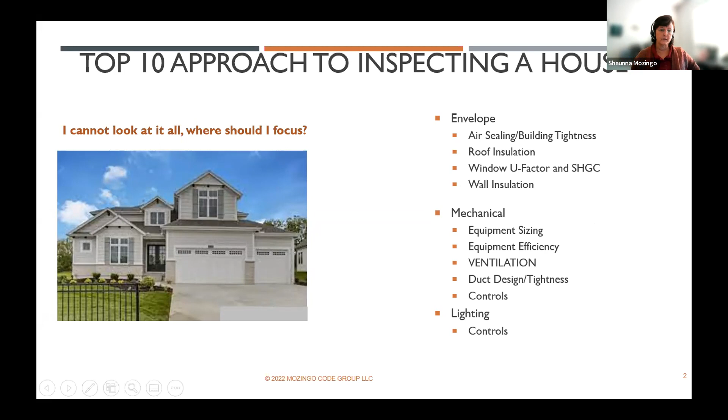Mechanical - the right size of equipment, the right efficiency of the equipment, ventilation, ventilation, ventilation. We're going to hit on that a lot today. Duct design, duct tightness - we'll talk about that. And controls, shutting things down when we don't need them. Same with lighting - the lighting efficiency of the light bulbs, they're pretty much there already. So it's really about shutting them off when we don't need them so that we're not running that electricity all the time.

One thing I've learned as an inspector is as I go through and I'm walking through a house, especially on a rough or a final - oh my gosh, there's so much to remember. So how do I get these things to stick into my head? What I've learned is if I understand how my building works, then I'm more apt to remember to look for certain things in the field. So I just have a couple slides here on air movement so that we can better understand why air tightness is such a huge deal in residential.

Wherever air can get into the building, so can moisture, pollutants, and other things. So we really want to keep this air leakage to a minimum for the building's durability, air quality, and health and safety. Also, if you have a lot of air leakage in and out of the building, your mechanical system has to work harder because, you know, maybe it's 20 degrees outside, and if that air is leaking in, the mechanical system has to reheat it. So we're trying to keep that mechanical system from not working as much - there has to be more efficient ways to deal with this. And we just want to gain some predictability on our interior environment.

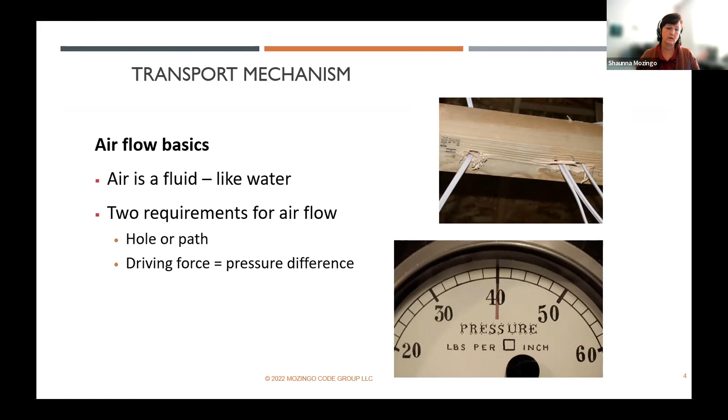So air moves just like water. It just needs a hole, and it needs the right pressure, the right temperature, the right relative humidity, and so air can move. And like I said, anywhere air can get in, so can moisture. So it's important to understand why we say seal all of these holes, or make sure that the air barrier is sealed everywhere. Air can move and bring with it a lot of different things.

The building works with stack effect. So you have colder air at the bottom. As it warms up, it rises, and it's trying to get out all of those holes everywhere in the building. That's why we're really strict about sealing up that attic access or getting tight around those can lights, because that air is trying to get out. And whenever air goes out, what goes out must come in - it's always trying to pressurize itself or keep a neutral pressure. So if air is leaking out somewhere, the house will draw air in somewhere else, and with it, it'll bring whatever it brings with it - moisture, pollutants, cold air that has to be reheated, hot air that needs to be cooled. So that's why we're trying to keep this - this is just the normal way that air moves.

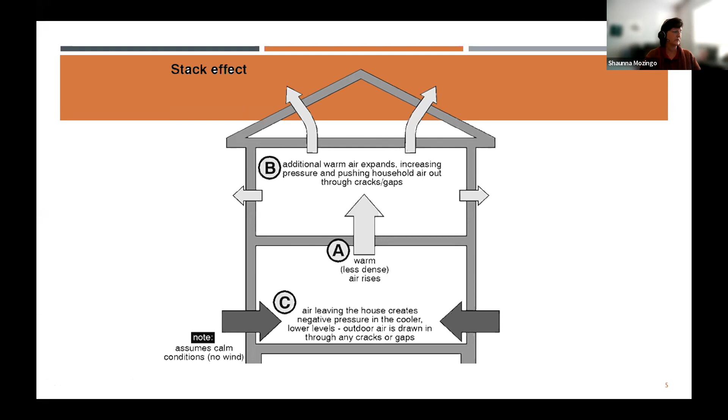So trying to make sure that thermal envelope is tight - that's why there are requirements for a tight envelope. Now new requirements say the plans have to show all the air sealing details on there, and hopefully you're inspecting from those plans to check those details that they've called out.

Something I want to point out here, and I know you've probably seen this a bunch, but this is one place that I find in residential we have a lot of problems - duct leakage and thermal envelope leakage. There are reasons why the mechanical code tells us to keep a tight duct system and to make sure we keep the envelope tight. A lot of times we think, oh, I need to keep tight ducts so the air doesn't leak out, so that if I need 200 CFM out of these supplies in order to keep this room 68 degrees, then I'm going to bring back 200 CFM.

I have to do supply equal return, right? So if I need 200 CFM, I don't want these ducts to leak so that I get the right amount of air there. Well, if the ducts leak, will I still get 200 CFM? Sure, I will, but the mechanical system has to work harder to get it there.

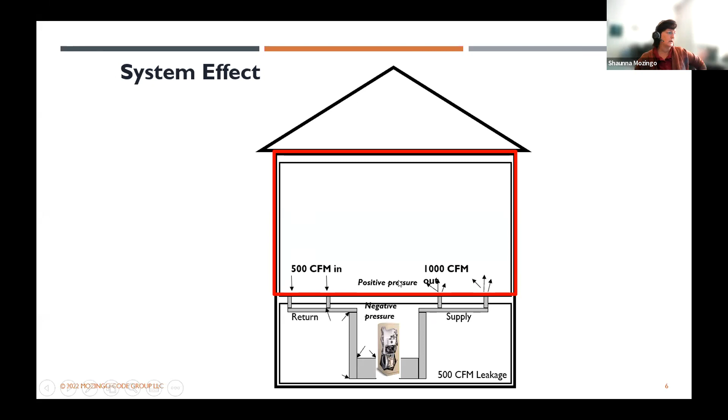So we often think about that when we're looking at duct systems and making sure they're tight and sealed. But something else to think about with a leaky duct: if you're trying to heat and cool this space and you're supplying maybe 1,000 CFM to heat that whole upstairs, but your returns leak and you're only bringing out 500 CFM, then you are overpressurizing the upstairs. You're blowing it up like a balloon. The house is always going to try to equalize its pressures within itself.

So it will force air to come in somewhere else, right? I'm forcing air out of this envelope through any hole that I have, and it will eventually make those holes bigger. And I'm sucking air in from outside, bringing with it any moisture or cold air, so now I have to work harder.

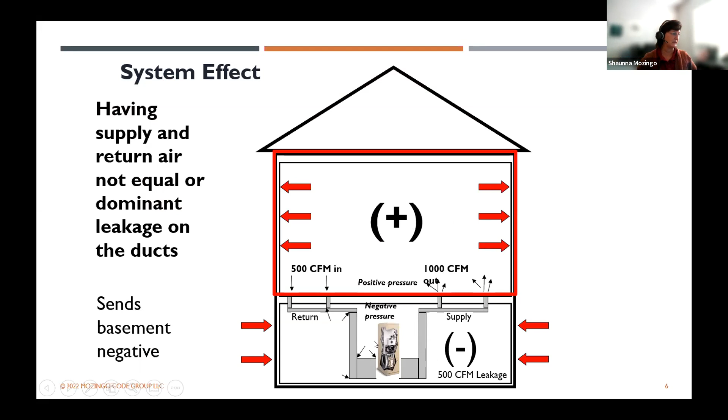So it's not just about getting the right amount of CFM to keep the room the right temperature. It's also about sealing those ducts so that I don't overpressurize or underpressurize any portion of the house, and make the building less energy efficient by bringing in colder air or wrecking my thermal envelope.

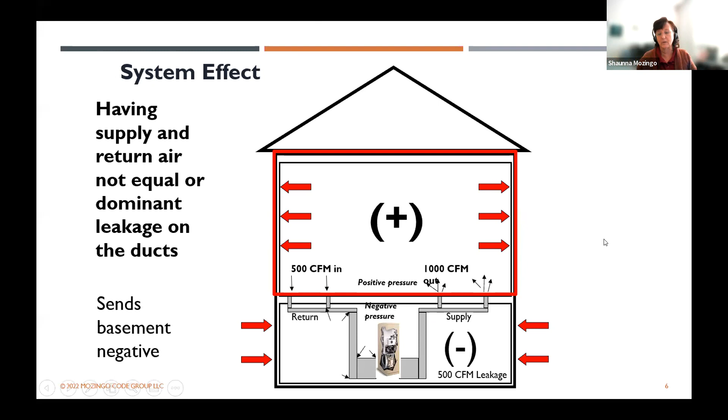So there are different reasons why we're always saying, make sure you seal those ducts. And sometimes just remembering that when I'm walking through on a rough inspection, a final inspection, or a mechanical inspection, and I'm looking at those ducts, knowing there's more than a few reasons why we need tight ducts helps me remember to look for that. Look for all of that pookie on there, right?

And we also want to make sure we're not bringing moisture into the house, because a lot of times we don't see that moisture till a long time after the building is up and operating, years afterwards, and people are sick and don't understand why, because inside their walls is moisture that got in. There's a lot of different ways it can get in there.

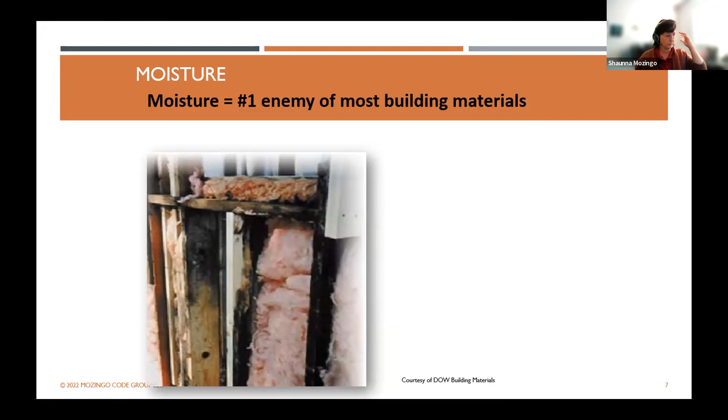So I'm just trying to point out why the code is so strict about building a tight house and getting that envelope right, making sure we don't have a lot of air moving through those walls. If air is moving through that wall, it's reducing the R value by going through the insulation. It's bringing with it any kind of moisture, cold air.

Cold air might be condensing on a warmer surface, or warm air might be condensing on a cold surface inside that wall, causing a lot of rot in there. There's all kinds of things that can be happening. So it's really important to be catching this at the inspection phase.

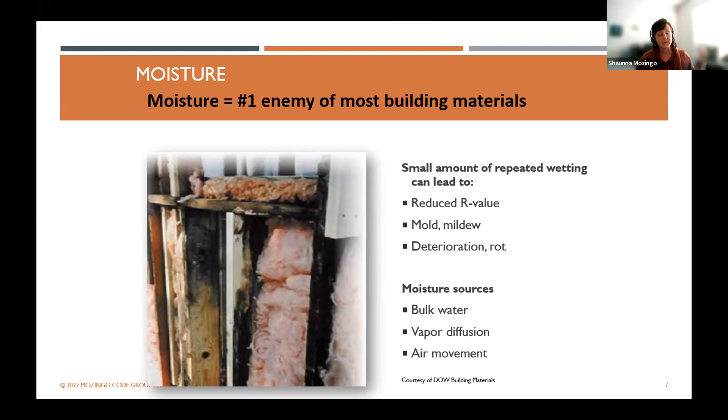There's a lot of moisture sources. Bulk water, I might have rain hitting a wall and it's getting through, or a sprinkler system that for some reason is hitting the wall all the time. There might be snow up against my house that's going to melt, and I have bulk moisture. I have diffusion, where with just the right temperature, air can move through building assemblies like drywall and other things, and I'm going to get that moisture in there just from air leakage, air movement. So lots of ways it gets in there.

Sometimes it's easy to see the moisture or the mold or the mildew on the surfaces. I have air leaking around a door, and it's cold air, and it's condensing on a warm surface here. So I'm going to get this mold. Somewhere in here, there is an air leakage problem, right?

Another thing with moisture is, the nice thing about air is it brings moisture. It can be, but air also dries moisture, right? So it's again about predictability. Where's the air coming from? I want ventilation.

If I had the proper amount of ventilation in this house, I wouldn't have this condensation. I need ventilation to keep that air dry and to keep these surfaces dry, but I need that air to come from a controlled source, not from the outside, that cold air hitting that warm surface or that warm air hitting that cold surface, right?

So that's what the code is talking about. And we're really going to hit hard on ventilation when it comes to inspections. It's definitely the top 10.

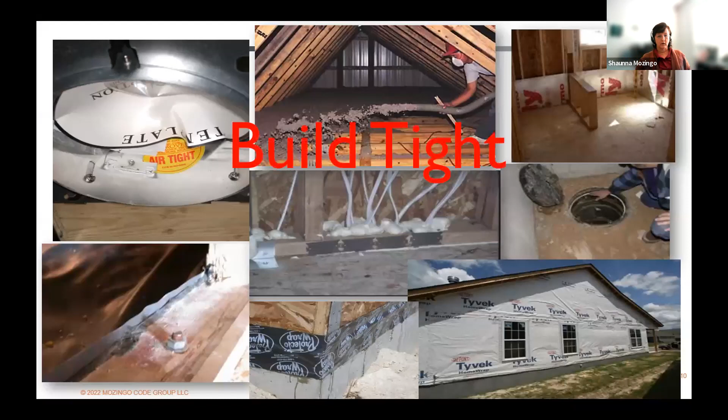You always hear it, but build tight and ventilate right. So a couple things that you should be aware of as an inspector for residential.

There is a new requirement in the 2021 that inspectors really have to look for the flow rates for ventilation. Maybe the IRC says, according to the size of this house, we need 75 CFM running continuously. Now there's a requirement that we actually prove that's what we're getting.

So there's a requirement for testing of the flow rates and a report that gets turned in. Most likely the building inspector or mechanical inspector is not out there testing those flow rates and carrying this equipment around. Most likely you will just be collecting a report from somebody that's doing it.

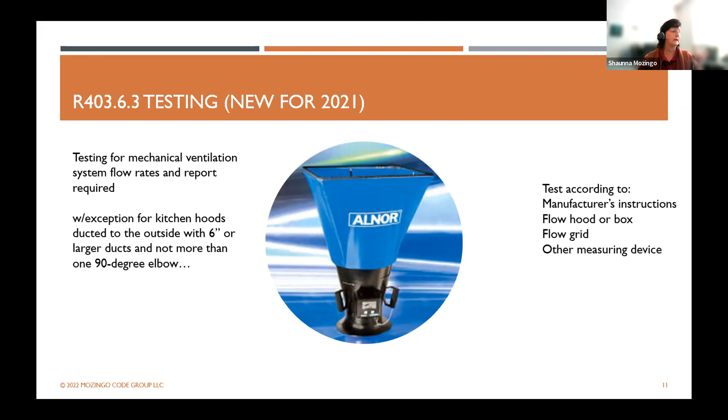We often require balancing on commercial, or some jurisdictions require balance reports on residential. We require duct testing and we get that report. We require blower door testing, we get that report. This is another report we're going to get that says, hey, this whole house was designed, and according to how it was designed, here's how much air needs to flow through there to keep it healthy, dry, safe. So we want to make sure we're getting that right amount of air.

IECC doesn't really call for ventilation, it says you have to have mechanical ventilation. We can't rely on outside air just opening a window. It has to be mechanically ventilated, and then it sends you to the IRC for how to do it.

So just a couple things as an inspector that are really important to note. It'll tell you that you can do a supply, exhaust, or combination system. So we'll look at each of those and what to look for.

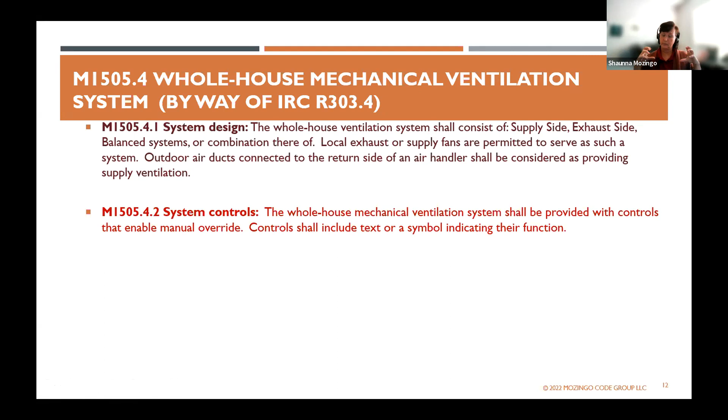It tells you that the system has to have controls, and it has to have an override control. So what it's telling us is, if you look at the table, which we'll look at in a second, it'll tell you how much air has to be brought in. And that table, or it gives you an option for a formula to calculate how much air has to be brought in.

That is at a fan running continuously, or a system running continuously 24 hours a day. They also have the option to not run continuously, to run only part of the time. So if that happens, there's going to need to be controls. A lot of times plan reviewers aren't catching this, and the inspector really needs to catch the fact that those controls are installed.

So if they say, oh, we're only going to run a quarter of the time, alright, where is that automatic control that will allow this system to only run 25% of the time? It better not be an on-off switch that the homeowner runs. We need that 25% of the time.

The code says if you run 25% of the time, you have to quadruple the amount of ventilation than if you were running continuously. So we just need to make sure as inspectors we're looking for those controls, and that there's also an override control.

So if there's a fire outside, or there's something going on, I have the ability to shut it off so I'm not sucking in all of that air with whatever system I'm using.

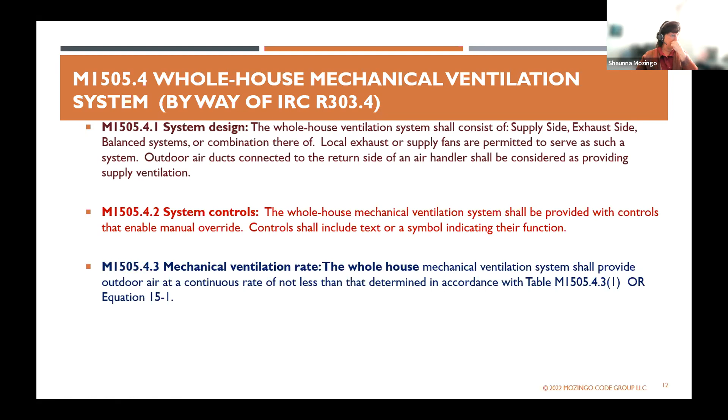The house, it gives you the option, like I said, for a ventilation rate that goes to the IRC mechanical section, and it tells you either do by the table or do by a calculation. It's based on how big the house is, how many people live in it, or at least how many bedrooms.

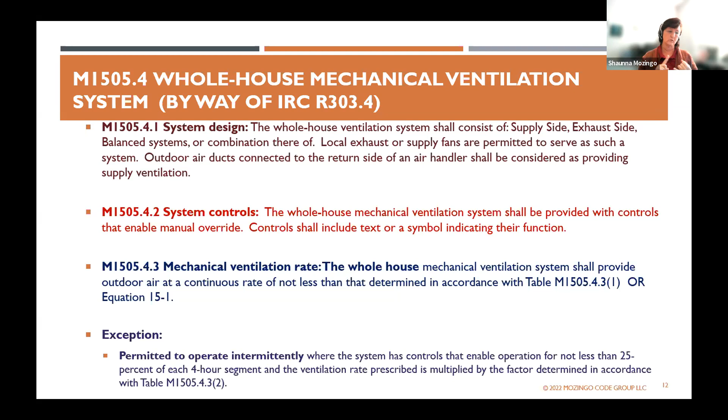And then again, an exception, you can run intermittently only part of the time as long as you have the right controls. That's where I see people putting in the right size exhaust fan or the right whatever system, but no controls to automatically make it run. So just be aware of that.

There's a bunch of different types of system. We can do an exhaust only system. What goes out must come in. So just keep in mind, this works fine for our climate. We have a drier climate in Colorado. And so it works.

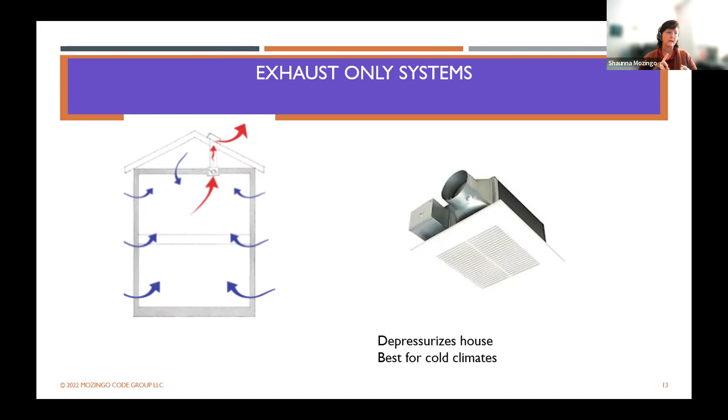It's not ideal for a tight house to just be exhausting all the time without offsetting it with some return or supply air, because you could start doing damage to the thermal envelope. But it works here. You could put an exhaust fan, usually in a bathroom, on a timer and have it going all the time - it'll exhaust air out and bring air in. So you want to make sure somewhere in the house they have 1 or 2 exhaust fans, based on how many CFM are required, with the right controls.

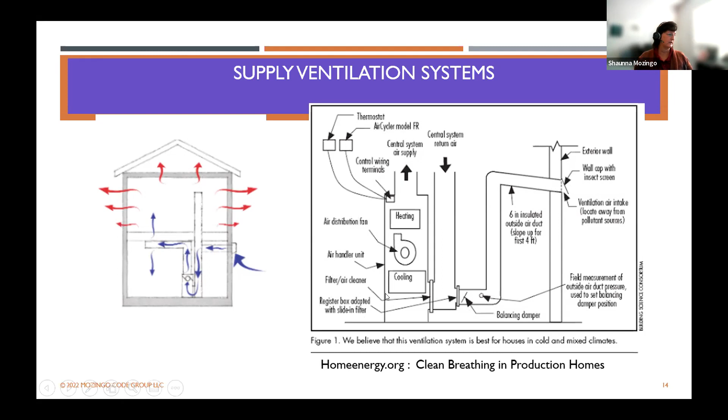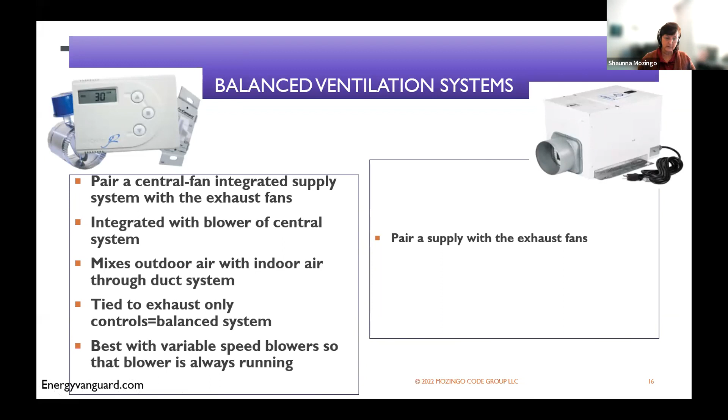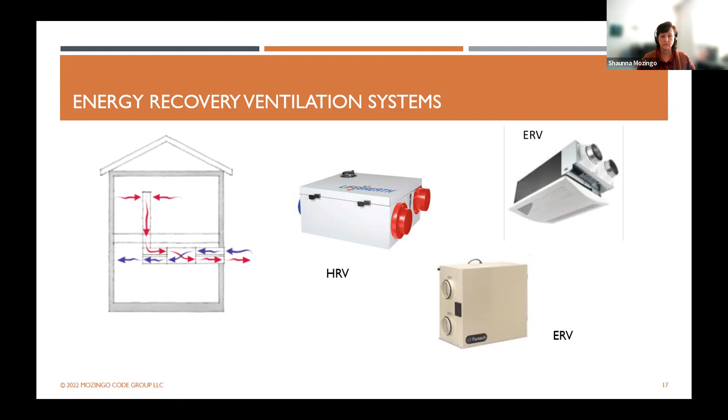Then there's ERVs - an ERV is an option. When people think 'I have to have balanced ventilation,' this is what they think, but it doesn't have to be this. It's more expensive upfront, but it also saves energy over time because it has a heat exchanger where the air from outside runs across it, tempering the air that gets brought in. An ERV, an energy recovery ventilator, will remove some moisture, where an HRV does not. An HRV, which is a little cheaper, is good in our climate because we have a pretty dry climate. So just make sure wherever the ductwork is installed, it's insulated, tight, installed to manufacturer's instructions, and has the right controls. It's so important that ventilation works correctly.

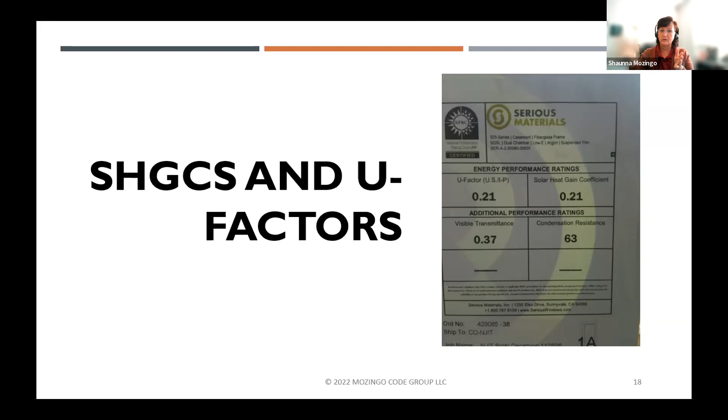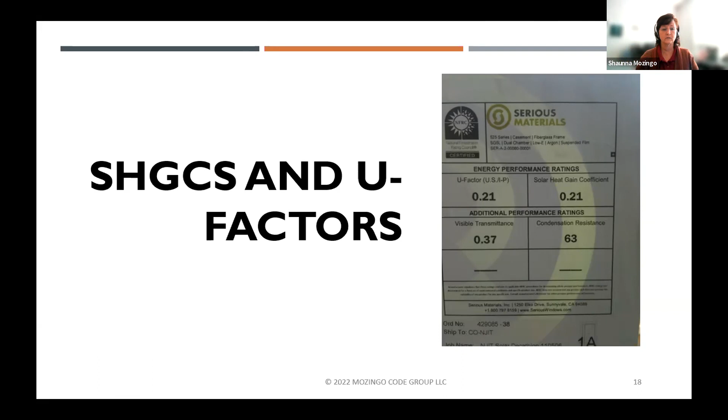U-factors - in residential, it isn't as big of a deal, I mean it is a big deal. The U-factor of a window is so important, because if you have a bad window, all that heat makes it in and the air conditioner has to work, or all that cold makes it through and the heater has to work. Wherever there's a window, there's no insulation, so making sure it's a good window would equal out to if there were insulation in the wall. There are stickers on the window for U-factor and solar heat gain. Pay attention - in Colorado, in some of these climate zones, U-factor or solar heat gain that was never a requirement before is now required in the 2021 code. So you're going to be looking at the U-factor plus the solar heat gain on those stickers - be sure you're looking for that. There are more requirements coming that will limit the amount of windows you can have on a residential building and lower those U-factors and solar heat gain coefficients. So it's good to learn about them right now - they make a huge difference.

So I just throw this up here as an inspector - it's good to know what paths are available to somebody in the code for residential. And the main reason I say that is because hopefully you're inspecting from the plans.

Say the plans say that they're going to put in a 0.32 window, and you get out in the field and they're not 0.32. Does that mean you fail them and make them put in the right windows?

If that was a prescriptive requirement, then instead of failing, they have the opportunity to go back and work through all of these code change paths of compliance. So if they start out prescriptive and they get to doing construction and it doesn't work, they have the opportunity to go change. Maybe they can run a REScheck that allows some trade-offs for the building thermal envelope, doing something above code here and below code there, but they equal out.

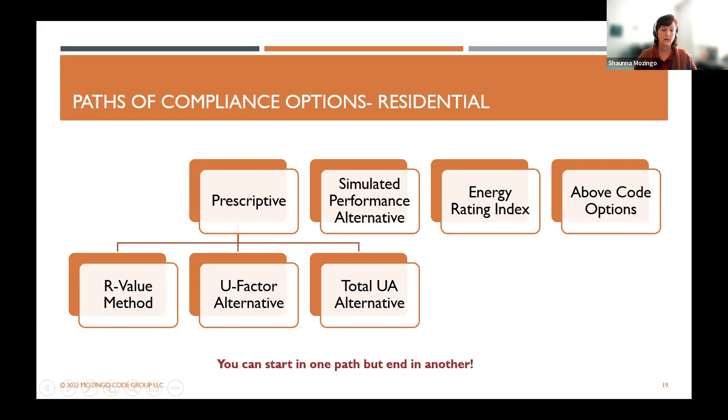So they have the opportunity to run a REScheck and see if they can still make it work. If they can't pass with a REScheck, they can get a rater involved and go performance, or they could go ERI for even more things to trade off. So it's not just one way. If they fail, it's not on you to tell them what to do, but there are other options they could pursue. They don't have to yank it out and put in something new unless they've gone through all those paths and still can't make it work.

Hopefully a lot of you are familiar with REScheck. One thing I've noticed in a lot of residential studies I do is that the REScheck is not making it into the field with the approved set of plans. This REScheck is letting us know if they're passing using this total UA trade-off.

It's a path they're allowed to use. And if so, it means they've gone through here and made some trades—maybe better insulation to put in a worse window, or a better window to put in worse insulation, or better insulation in the ceiling to put less insulation in the wall. There's all kinds of ways to trade, but it only applies to the envelope.

So it's important to know that a lot of times U-factor is not something you find on the plan, or R-value isn't something you find on the actual construction documents. A lot of times it's found in this report. This report is what you inspect off of for energy.

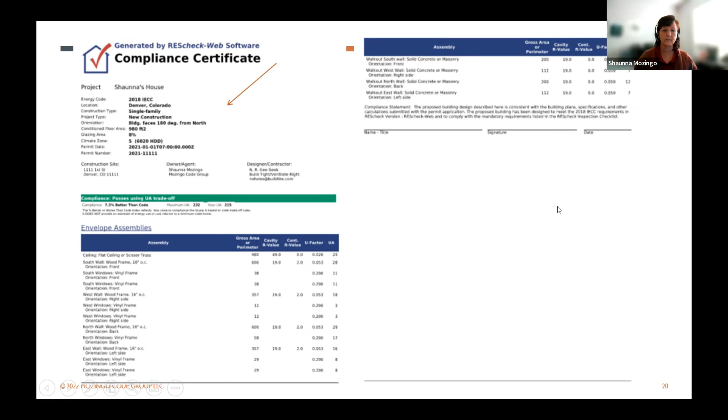So if I'm going through, hopefully I open the set of plans, and somewhere in there is this REScheck, and I open it up and see—oops, going the wrong way. It tells me I have a flat scissor truss with R49 insulation. That's what I'm going to look for, because they got it to pass using these values. Any other value, they either need to redo their REScheck to make sure it still passes, or they need to go a different path.

This tells me I have a wood frame wall at 16 inches on center with R19 in it and R2 continuous. Is that what I'm seeing in the field? Do I see the R19 in the cavity—probably a batt? But it also says I have an R2. What's that R2 about? Do I have insulated siding? Do I have a rigid foam board? What do I have on the outside of that building that's getting me an R2?

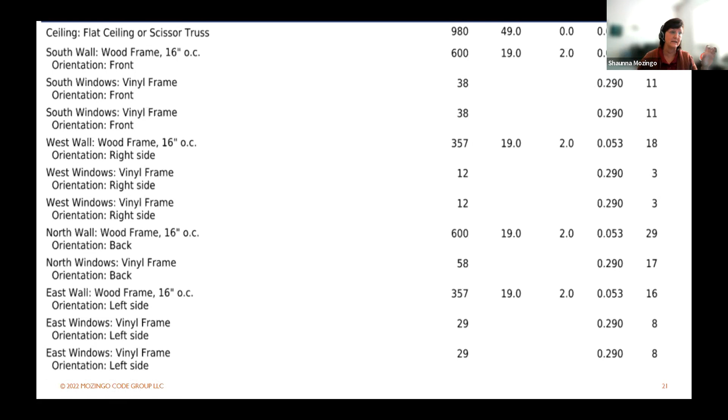If you're not seeing it, then they need to go back and redo the REScheck with what they really did, to make sure they still passed, because they only passed by putting that R2 on the outside. So just going through here—did you see 0.29 windows on a vinyl frame? This is what they said they were going to do, and this is how they got to pass energy compliance. This is what you should be inspecting off of.

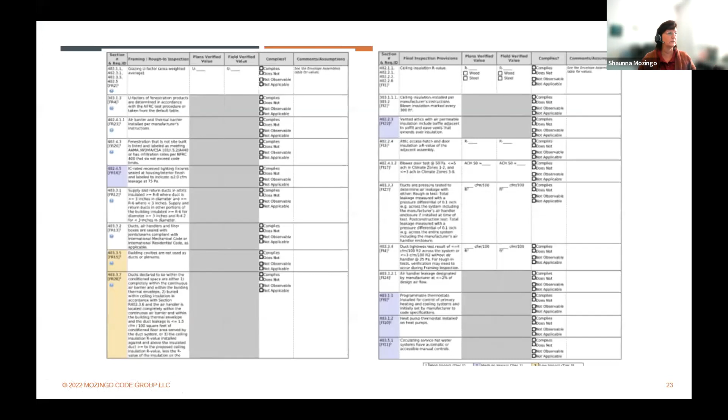There's an inspection checklist that REScheck prints out that is kind of handy, because it's specific to each house based on what you chose through there. It'll tell you what to look for and all of the mandatory requirements in the code, and it's laid out in the order of construction, from framing and rough-in inspection all the way to final inspection. Not that you have to use it, but some people like checklists.

If they went performance, it's almost the same thing. There's software out there that goes through and tells you, okay, how much did it cost to build this house? If I modeled it, how much will it cost in energy? And as long as it costs less than or equal to if you built it prescriptively, you're fine. The report is several pages, but it's just like a REScheck. It gives you what they said they were going to do - this U factor, this R value in the ceiling, this R value in the basement - and you need to make sure that's what you're inspecting off of, because that's where they made their trades.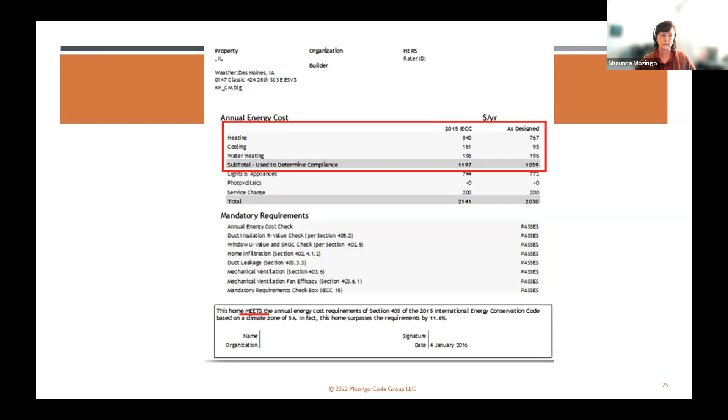So just being on the lookout. Then there's the ERI path - exact same software as that performance path, it just uses an ERI score. So you're making sure that if they said they were going to get a score of 45, they got a score of 45. It doesn't necessarily matter - what you really need to make sure is that for your climate zone, say you're in climate zone 5, if the max score you can get is 61, that they stay under 61. So they may have said they were going to get a score of 45 when they turned in the plan, but they might end up with a score of 60. They still pass, right? So that's okay, unless you have some amendments locally on a specific ERI score. That's kind of how you read those reports. Each report tells you what they said they were going to do in that house as far as R value.

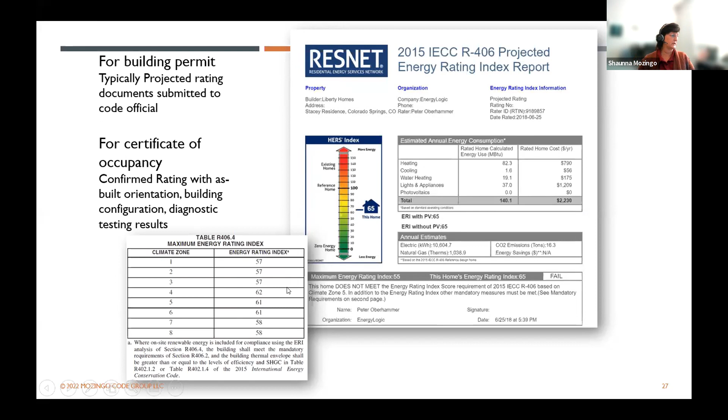So be inspecting from those documents.

And then there's the 2021 residential code, which brought in additional efficiency package options. So if I went with prescriptive or REScheck, I have to choose one of these options to do on top of everything else the code required. Somewhere on the plans it has to say what they chose, and that's what you need to be inspecting for, because this is what's getting them all the way to energy compliance. Without this, they're not all the way there. This is not something additional - this is to get you to full compliance.

So if DOE said that the 2021 energy code was 9% better than the 2018, it's only 9% better if they do everything that they're supposed to do. Instead of cranking the code down by 9%, they cranked it down by 4 or 5%, and then gave you options for how to get the other 5%. So you can see they have to choose one of the options in there: 5% better UA like a better REScheck score, or 5% better heating or cooling with more efficient equipment, better water heating equipment, a ductless thermal distribution or better duct system along with a better thermal envelope, or a better blower door score and an ERV or HRV. They have to choose one of those options to get into full compliance.

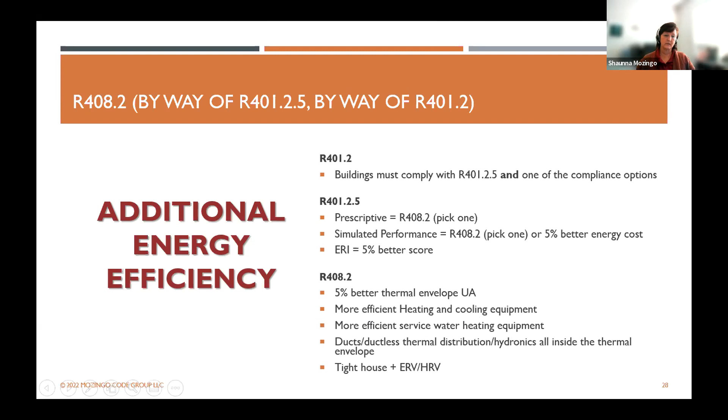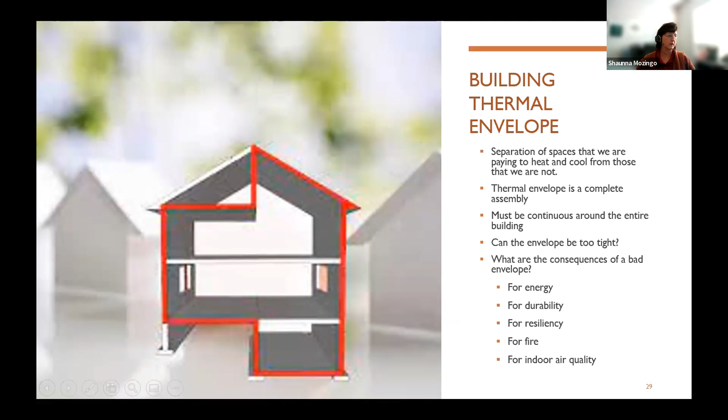So you just need to make sure that if they said we're going to put in a 5% better furnace, that they're not getting in there with an 80% furnace, right? Because they said they were going to choose high efficiency. So just something to pay attention to on the plans to make sure they're getting all the way there. Make sure the thermal envelope is fully sealed - the air barrier must be continuous all the way around, so every joint, seam, and penetration has to be sealed. That's something we really have to be looking for on these plans. That's why the code calls for a blower door test. Most of the time as an inspector you're not doing the blower door test yourself - you're looking for that report that says in your climate zone they got to 3 air changes per hour or less.

For those of you that are freaked out about it, I can tell you, I just looked at a study I did last year for NASEO, where we looked at 126 houses, and out of those we did 64 blower doors across the entire state, on people that were on anything from the 2009 code to the 2018. Out of 64 houses, only 8 did not pass. It's not that hard if you get the air sealing details correct. So that's important for inspectors to realize, we don't want to get to the end and fail a blower door. We really need to keep up with that envelope as we go.

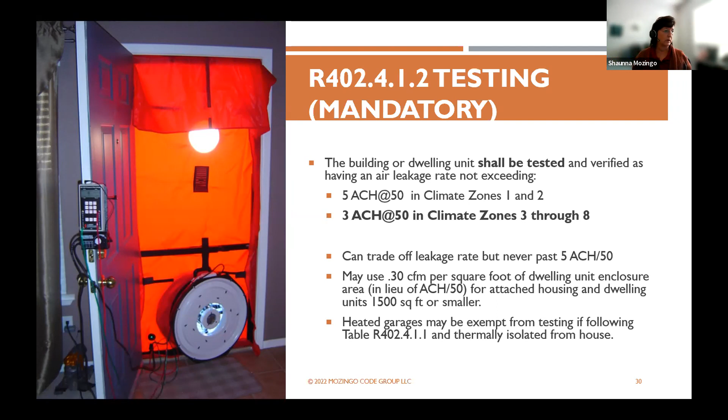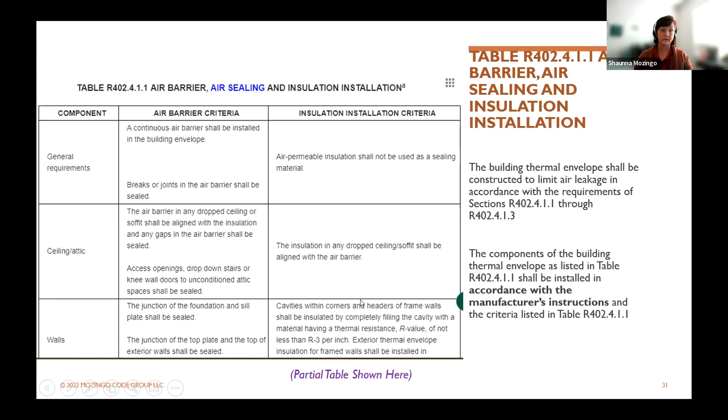Make sure that air barrier is continuous all the way around so that we don't get to the end and fail. There's an air sealing table in the code that they have to follow, and these details are all supposed to be on the plans of where to seal. If they do all of this, they're going to pass that blower door test, and all you're going to get is that report at final saying, yep, passed the blower door test.

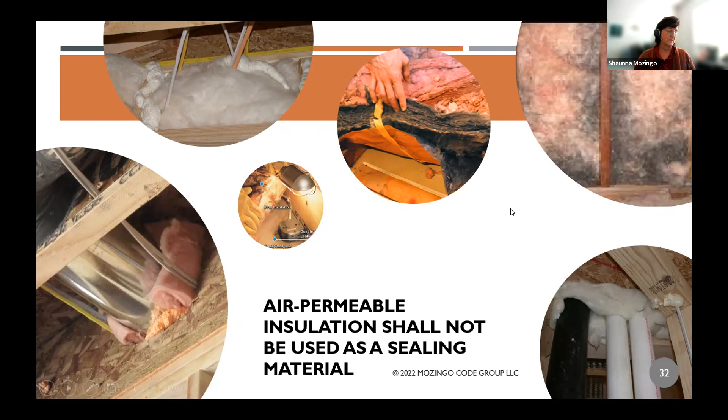So a couple places that I want to talk about where I see people messing up their thermal envelope. One is allowing air permeable insulation as a sealant. Around doors and windows, I see batt insulation used a lot. That works as a great filter, but it doesn't seal air. So be sure that, if it's part of the thermal envelope, we're not allowing batt insulation as that air sealant. We're making sure it's something like backer rod or foam or some other thing that allows air sealing and not just air filtering.

I also notice on attic knee walls that they're not getting their air barrier. An attic knee wall is actually an exterior wall - one side is unconditioned space and the other side is conditioned space. You need to have an air barrier up there. Maybe it would also hold the insulation where it's supposed to be. But I do notice a lot of attic knee walls not getting an air barrier on them.

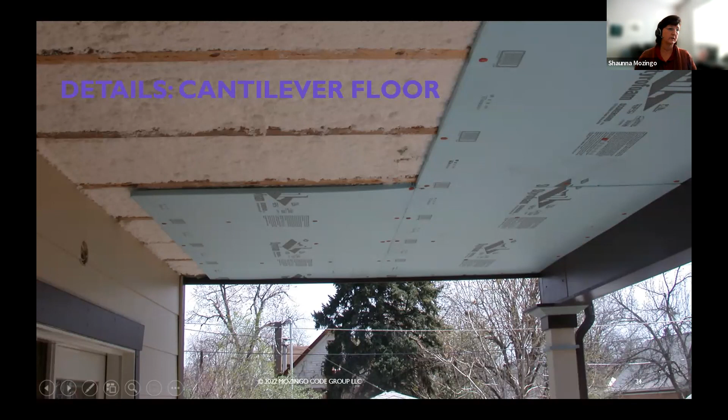And then I also see cantilevered floors getting missed, because there's not a lot of floors that have to meet code residentially, but we just need to make sure that anything over outside air or anything over unconditioned space gets its air barrier and air sealing. Making sure all of these places are covered - that's somewhere I see get missed a lot.

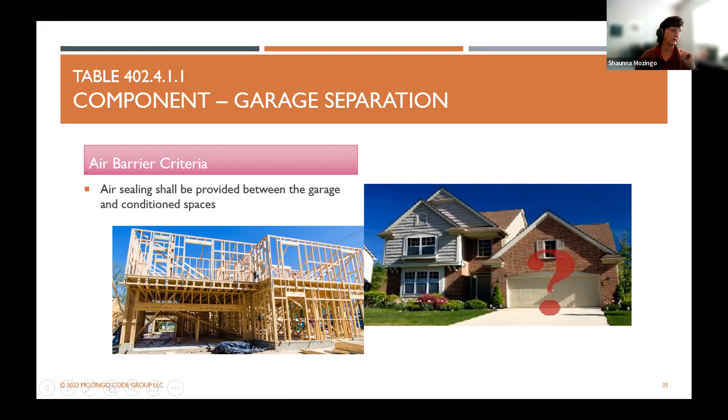And sealing between the house and the garage. Even if you're conditioning the garage, the code requires a thermal isolation between the two so that we're not sucking garage air into the house. Plus that garage door is pretty leaky. So if I'm trying to do a blower door and pass it and I don't have a good sealant between the two, it's going to be harder to pass that blower door test for the house.

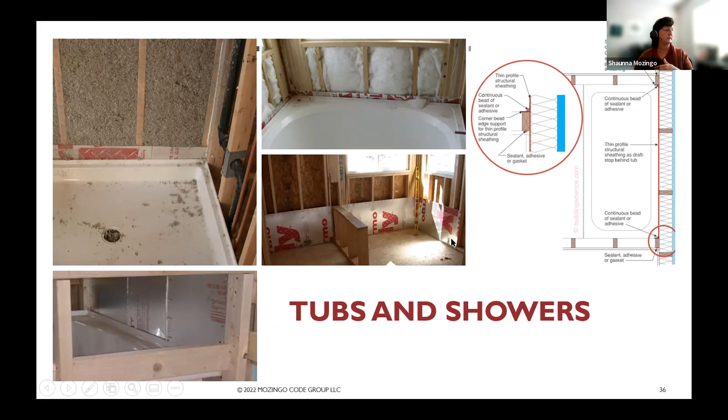And then I also noticed that a lot of people, when you have a tub or shower on an exterior wall, aren't getting your air barrier on there. So the tub gets set and no air barrier gets back there. Somebody might put insulation, but they're not getting an air barrier, so it's getting a lot of leakage in there. You're going to get moisture, condensation, and the insulation not working well. So making sure wherever you have a tub or shower - I always walk through on a rough inspection where I see a tub, and this is the common thing that I'm seeing, thermoply slapped in place. Then they can come set their tub and still insulate behind it later, but get that air barrier and air sealing before the tub makes it in - then it's much easier to do.

And electric boxes - it's amazing how much air, when you turn a blower door on and it's sucking all the air out of the house, air is being forced in somewhere else. How much of that air is coming from the attic, down the wall, and through that electric box. So making sure that electric box is getting sealed, because when a blower door isn't running, the air is moving the other direction. Any air or moisture I have in the house is getting into my walls through the electric boxes the other way. So we just really want to make sure those are getting sealed.

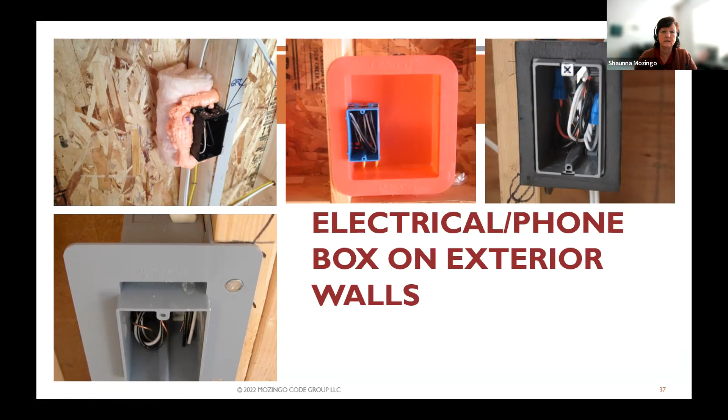Those are a lot of the places that I find problems with. I want to bring your attention to the 2021 Duct Requirements, where it was revised.

The basic intent here is if I have a duct in my exterior wall or in a floor over unconditioned space, I need to make sure I'm separating that duct from the unconditioned space. A lot of paths, like a performance path or an ERI path, give you a better trade if I say all my ducts are in conditioned space. The only way to do that is to make sure there's insulation and an air barrier between the duct and the conditioned or unconditioned space. Otherwise my ducts are considered to be in the unconditioned space. So there's a new section in the code that specifies whether it's in a wall, a floor, underground, in the concrete, under a slab, whatever, how to call it conditioned space and how to insulate it. Some new requirements there.

Really look at the plans, because if they're getting a credit for ducts in conditioned space when going performance, that's probably one of the biggest credits you can get. So there's a big credit for that. Make sure you're really looking for that, because you want to make sure they have an air barrier and insulation under it.

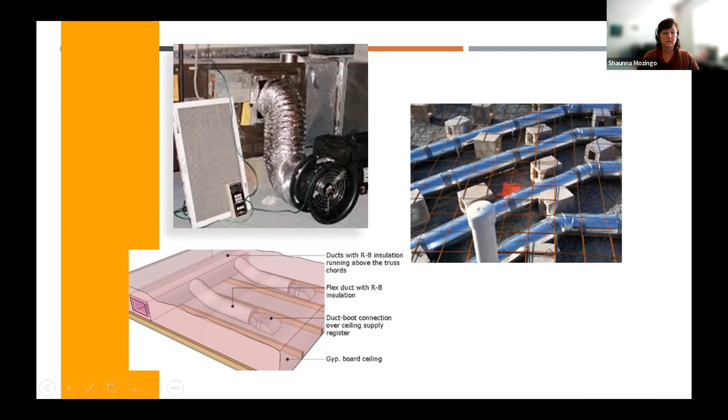I want to bring your attention to the fact that all ducts have to be tested now. It used to be only the ones in unconditioned space, but in 2021 you have to test all ducts. They don't want ducts leaking even from conditioned to conditioned space, because you're just moving air where it doesn't need to go if the ducts are leaking. Ducts within the thermal envelope can leak a little bit more, up to 8 CFM, and outside the envelope, 8 CFM inside, 4 CFM outside. So they can leak a little bit more, but they still have to be tested. That's new for 2021. Look for that duct test report for all ducts.

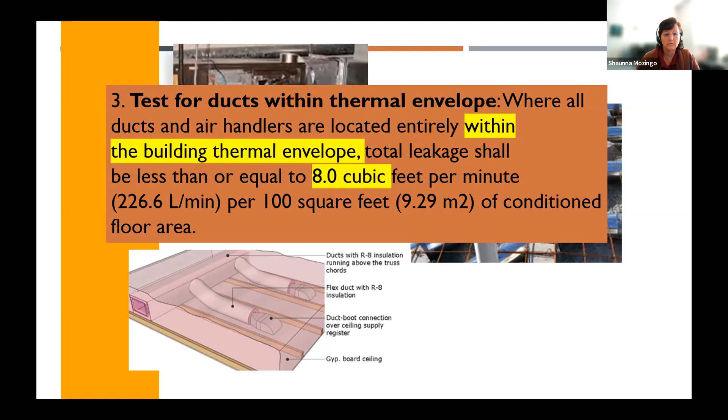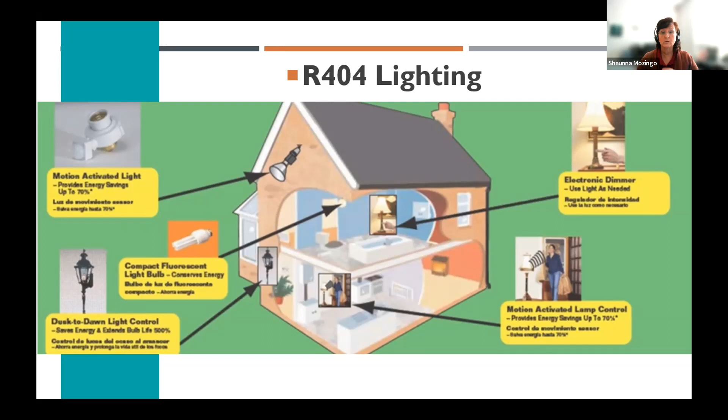Lighting - this is new for 2021. 100% of the lights have to be high efficacy, so you're looking for 100% of those light bulbs to be highly efficient. Then you're looking for controls. There's a new section requiring either a dimmer, an occupancy sensor, or some other control built into the fixture to be installed for the lighting. There are exceptions for bathrooms, hallways, and exterior lights, but exterior lights also have a new section in the residential code that says if you use more than 30 watts outside, you also have to have those on a control. So some new requirements for lighting to make sure you're inspecting for that.

Whew, that was residential, it takes most of the time. Commercial is really about internal loads. It never had a big focus on the commercial envelope until 2021, and now it does. So it's really about controlling things and shutting them down when not needed, and keeping the mindset that whatever happens with mechanical is affected by the envelope, which is affected by the lighting. All of them work together.

There's a limit to how many windows I can put in before I have to put in a certain amount of lighting controls. I can only have a certain amount of windows before it affects my mechanical equipment. So there's all kinds of interactions, you just have to keep that mindset.

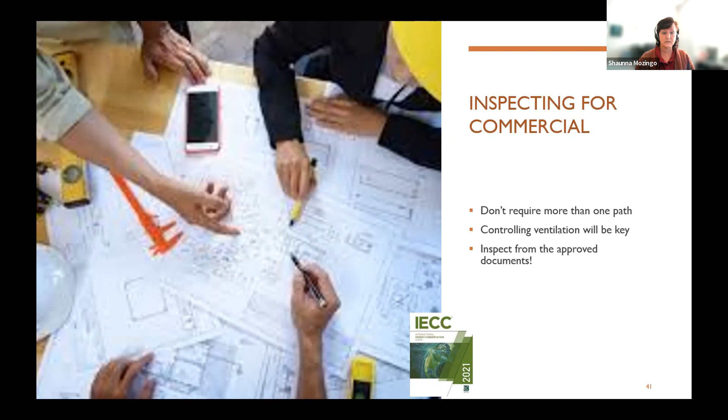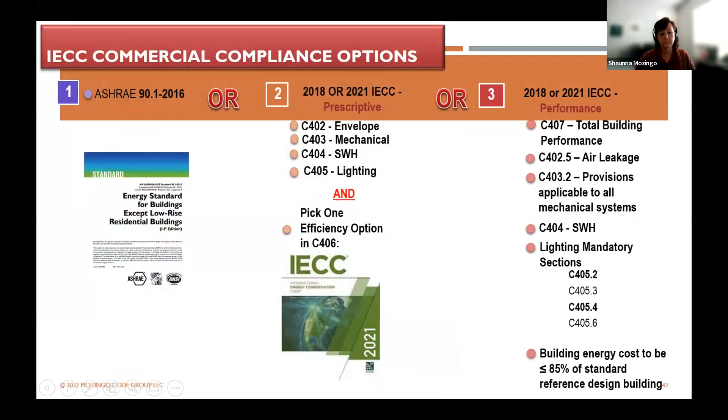Same as residential, stick to a path. If they don't pass it, there's another path they can choose, but don't make them go through more than needed. I often see on commercial where a jurisdiction requires a Comcheck no matter what, but Comcheck is for one path of compliance. If they go that path, yes, they need to turn in a Comcheck or something similar. But if they go prescriptive, they don't need a Comcheck. If they go performance, they don't need a Comcheck. So make sure they're only going by one path, and make sure you're inspecting from those documents based on the path they chose. There are 3 different paths - they can go with ASHRAE 90.1, the IECC prescriptive, or performance. So make sure you know what they chose so you're inspecting from the right documents. What about Comcheck?

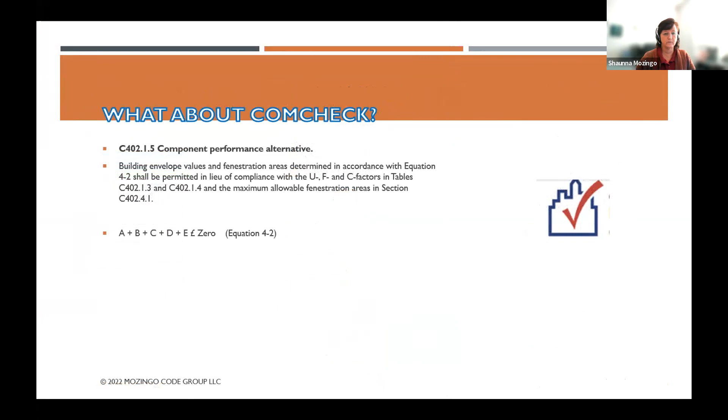Comcheck fits in here in this prescriptive path, but it's an alternative to prescriptive. Comcheck is great, you can review from Comcheck. They're allowed to trade off in Comcheck, but only in the envelope.

There is a mechanical and lighting report that shows up in Comcheck, which is just a mirror image of the plans. So if the Comcheck says there's 3 water heaters and 4 mechanical units, that better be what the plans show, because they're supposed to be exactly the same.

So you can inspect from the Comcheck. It has inspection checklists, those are great too. But on the envelope part is where they're allowed to trade things off, so just make sure that you're really looking for whatever that says.

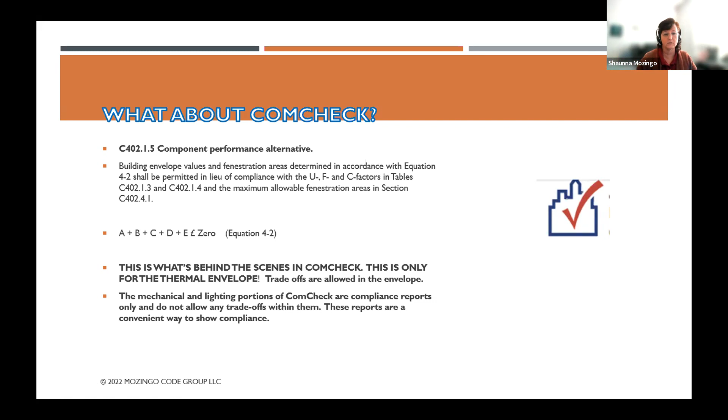They're going through their building this Comcheck based on what they're going to put in the house or put into the building. So what kind of roof? Is it insulation above deck? Is it an attic? They're building all this inside Comcheck and telling it what height of insulation and everything. So then Comcheck is forming that report that you inspect on based on what they said, and it should mirror the plans.

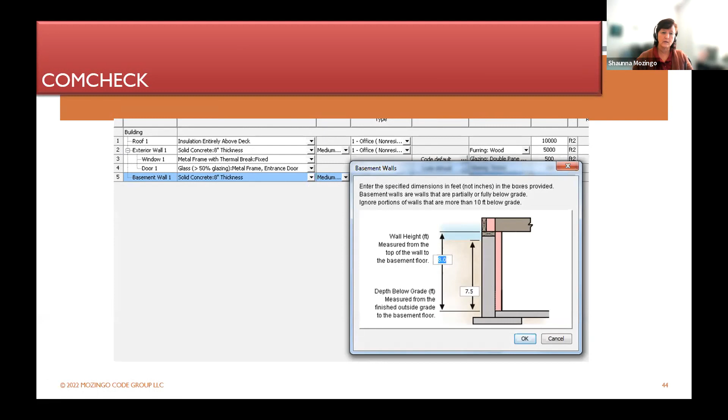Some things about windows have changed a little bit. It used to be that if it was a metal frame window, it could have a worse U factor, vinyl had better. Now it's about, is it a fixed window? Is it an operable window? What kind of window do we have? And so that's new.

For the 18 and the 2021, solar heat gain used to require a worse window on the north than you could have on the southeast and west, and now it's the same.

Is it fixed or operable? Fixed windows have a lower number than operable. Operable has moving parts. And then there's the projection factor.

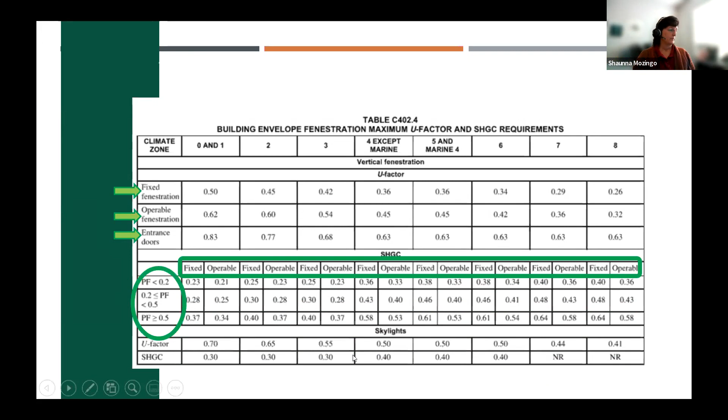This is something that inspectors need to pay attention to. People can get a break on their U factor, but they can only put in so much windows. They're only allowed 30% of their building to be windows. So if you see a building with this much windows, you can bet they're supposed to go performance, and you should be looking for a performance report that tells you what they're doing.

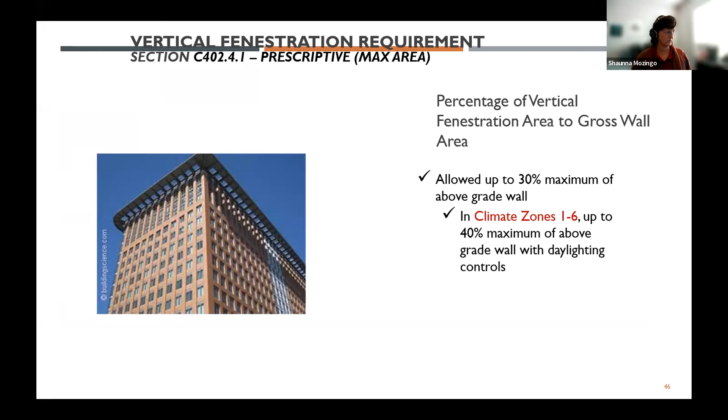They can go up to 40% as long as they put in some proper lighting controls. So if they have 40%, then you're looking for the right lighting controls. And so that's just the same thing.

What I want to point out to you is to be looking for those projections, because a lot of times they'll give themselves credit for a projection. If they put a projection over the window, they can have a worse window because they're blocking some of that solar heat. So they might tell you they're putting in a projection, and then you get out there and they don't put in one at all. We need to know that.

Because then they need to put in a better window. So that's just something you can usually see on a Comcheck. It'll tell you under their window description that there's a PF, and it'll tell you how big that PF is. The bigger the projection over the sill height, the bigger the PF, projection factor. So just really want to pay attention to that and let the plan reviewers know if they aren't putting in the projections like they said they were going to.

Air barriers have always been something required in the code, but just not really specific. Each cycle it gets a little bit more specific on what you can do, on what counts as an air barrier, as long as all the joints and seams are sealed. It's walked you through different materials that can be considered air barriers as long as you seal all the joints and seams. So that's what you're looking for.

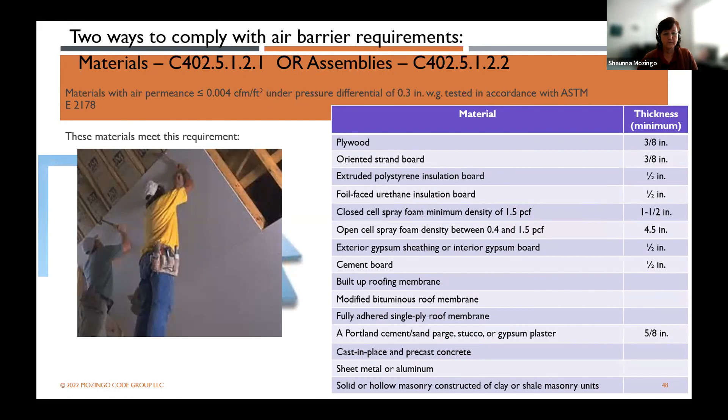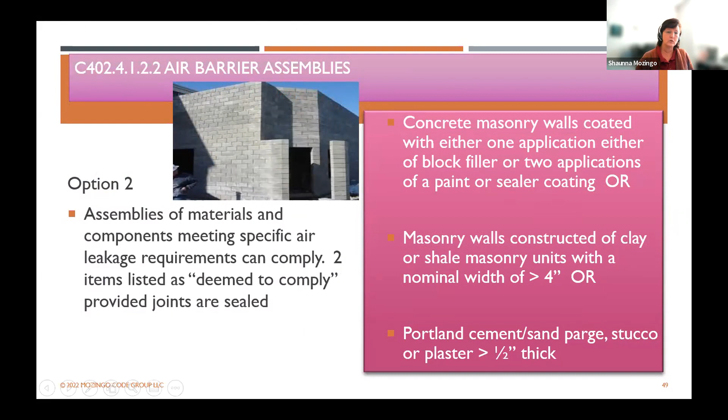However, you might be relieved of some of that duty right now because if you have concrete or CMU blocks, these are permeable. So it always asks you for some type of coating on them to be your air barrier. Well, the code had realized that maybe everybody isn't looking at it as close as we should, and realizing that maybe we need a tighter envelope for commercial, just like we do residential. So it brought in the requirement now that air leakage testing is in commercial buildings, which it wasn't before.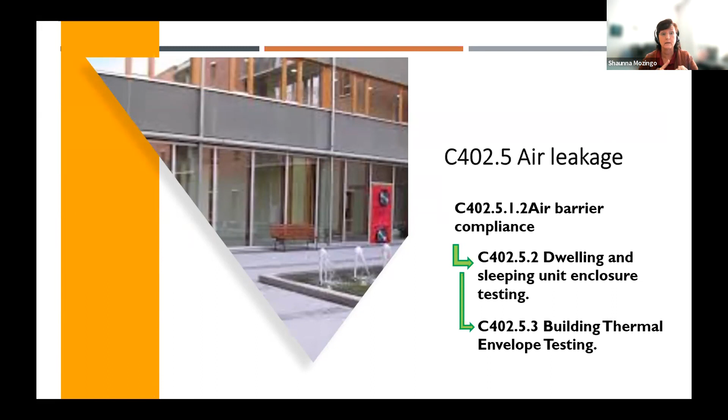Dwelling and sleeping units have one test, and then everything else is dependent on the climate zone and the size of the buildings on whether it has to be tested. So not every commercial building has to be tested. Every dwelling unit or sleeping unit has to be tested, but everything else might need to be tested depending on the size. So you might need to look at that plan to see if they say you need to be collecting a report.

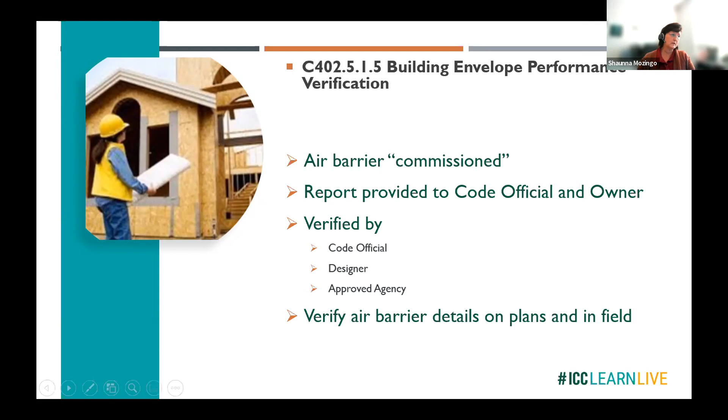But one thing that all buildings get is the air barrier has to be commissioned. Somebody has to provide a report to the code official that says they verified the air barrier as it's being installed. There's an air barrier on the foundation, the walls, the ceiling, the whole thermal envelope. So somebody has to see that as it's being installed and verify it. It can be the code official if your jurisdiction decides, but most likely it's going to be a third party, and they have to turn in a report saying that air barrier was continuous and installed correctly. So that's new, and it may save you some inspections because somebody else is doing it.

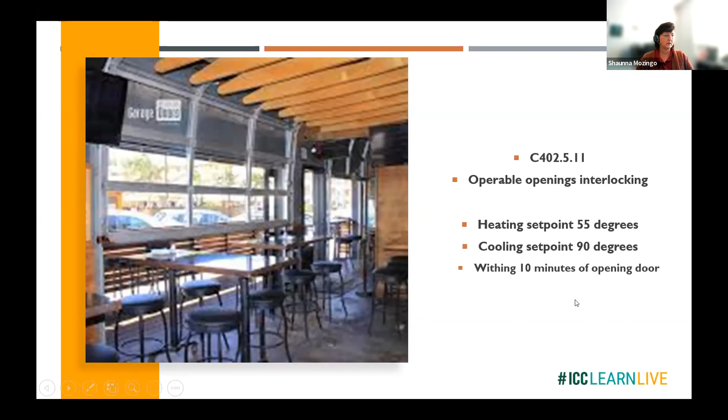Also in line with that, we have restaurants that want these big doors to open to the outside, which is great, provides a good environment, it's fun, but it also wastes a lot of energy. If I'm cooling this room to 70 degrees and it's 100 degrees outside, all I'm doing is cooling the outdoors. So there's requirements now that these doors be interlocked with the mechanical system. It's important that you're looking for that, whether that's the mechanical inspector's job—it depends on which inspector is going to be looking at that. Probably a mechanical inspector needs to make sure that it's tied into the mechanical system so that when the door opens, it shuts the heating or cooling back within 10 minutes. That's a new requirement in 2021 to be inspecting for.

Mechanical and water heating is really about control issues. Put everything in the way the mechanical code tells you, but shut it down when it's not needed. How much air I need to bring into the building, we're going to design for the mechanical load, for the occupancy, the occupant load. We're going to design according to the mechanical load, but we're going to provide controls to shut it down when I don't need that many people or that much air brought in. Because if you think about it, huge commercial buildings have much more requirements for ventilation based on occupant load, and they're bringing in tons of 100-degree weather, so the air conditioner is running 10 times more. We're trying to say let's not have that happen—let's only bring in as much air as we need so that equipment isn't running so much. We're going to design for maximum, but control for minimum. That's the idea behind the energy code. 75% of the entire energy code is designed to keep that mechanical system running as little as possible, because that's where you're burning energy.

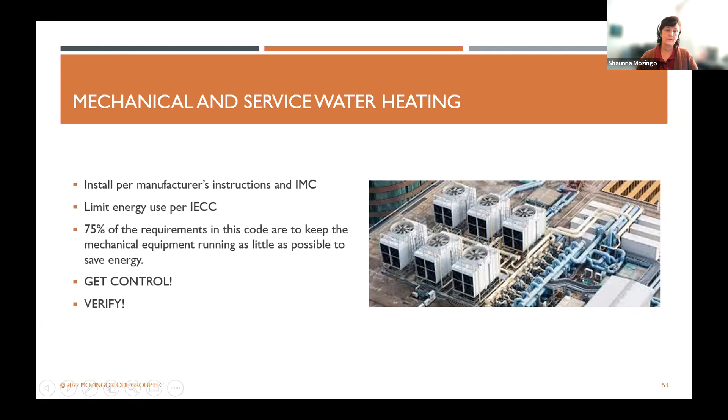So keep that in mind, that's why there's new requirements for demand control ventilation—meeting the demand. It used to be based on occupant load: big occupancy rooms like a conference room or education room, places with higher occupant load, had to put in demand control ventilation. It's a sensor, a CO2 sensor, that senses how many people are in there and says, okay, instead of the room holding 100 people with only 10 in here, I'm going to make sure I'm only bringing in enough ventilation for 10 people, not 100. Now they've changed it so any single zone system has to have demand control ventilation. You really want to pay attention to that change, because this is probably one of the highest impact items for commercial buildings—controlling the amount of ventilation that comes in at outside air temperatures.

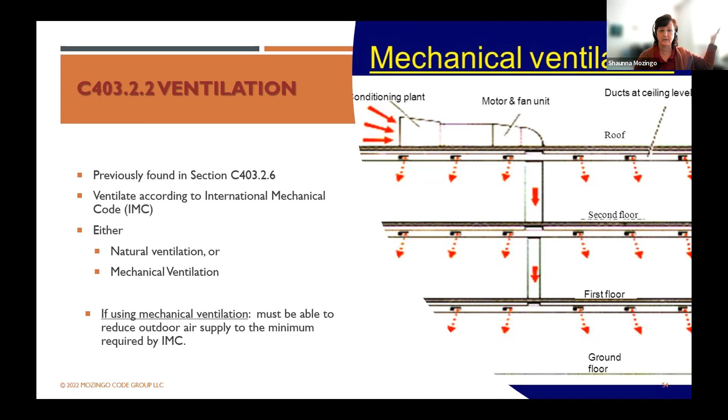And then putting in the right size equipment—all new tables in there. So make sure that whatever the plan said, if they said they're putting in 95% efficient equipment, or this COP, or whatever—there's all different kinds of energy efficiency measures—whatever the plan said, hopefully that got reviewed and approved, make sure that's actually what they put in.

And then heating and cooling system controls. Does it have the right deadband so it's not simultaneously heating and cooling together all the time? Does it have overlap? Does it have the right startup or stop controls or sequence of operations? It's controlling when that air kicks on and kicks off so that we have better control over those energy bills and the energy use.

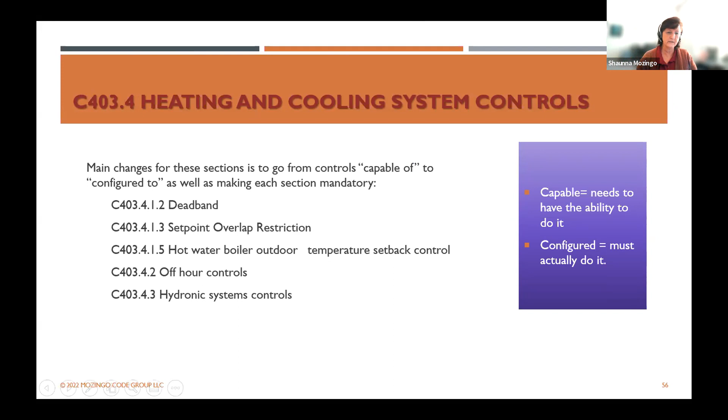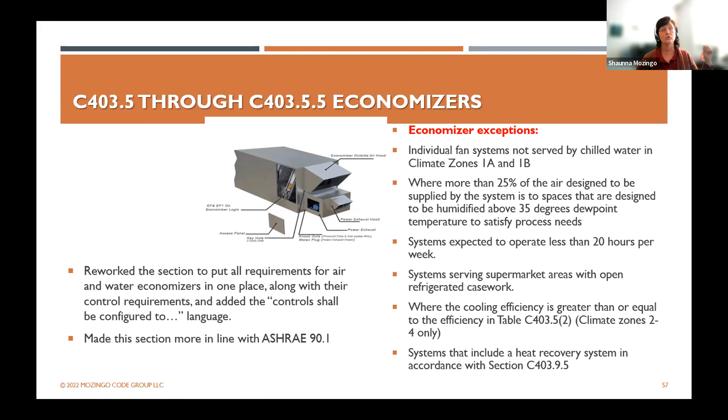Economizers are huge. In a lot of the buildings that I see, 90% of them have economizers, but about 10% of them are hooked up correctly. That's free air. So if it's 100 degrees outside, I'm running my air conditioner. But in Colorado, the temperature might drop, and it might be 50 degrees out at night. Why am I running an air conditioner to cool it to 70 degrees when the outside air is 50 or 60? I should bring in that outside air. That's what an economizer does. But a lot of times it's not hooked up at all, or it's not hooked up correctly and it's not working. This is a huge energy saver right here. So please be looking for that.

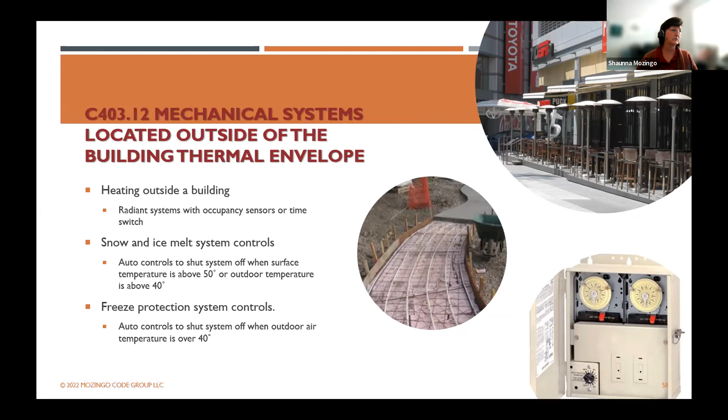And then outside controls. If I have a boiler that's running a bunch of snow melt, I want to make sure that boiler shuts off when the snow can melt itself because the temperature outside is warm enough. Or if I have a bunch of heating outside the building, is it on a sensor or some kind of control so it's not running when nobody's out there. There's all kinds of things we could be looking at, and it's really important for the inspector to be looking for those things if they got called on the plan.

Lighting is huge. Lighting is one of those places that gets missed a lot. There are new requirements in there. In a big warehouse, every aisle should have its own lighting control to shut the lights off on each aisle, or to turn the lights on actually on each aisle. So if you go down an aisle, the lights turn on, but not for the whole warehouse. Same with office spaces. If nobody's here, but there's one person way over here, why are we lighting the whole place? So there's requirements now to make sure that we're just not overdoing it.

There's also some new requirements for some occupancy sensors in hallways. It's brought in line with the IBC. It doesn't affect egress. It doesn't affect safety lighting, but there are some things in there to be aware of. So really looking at those lighting controls in all of those spaces.

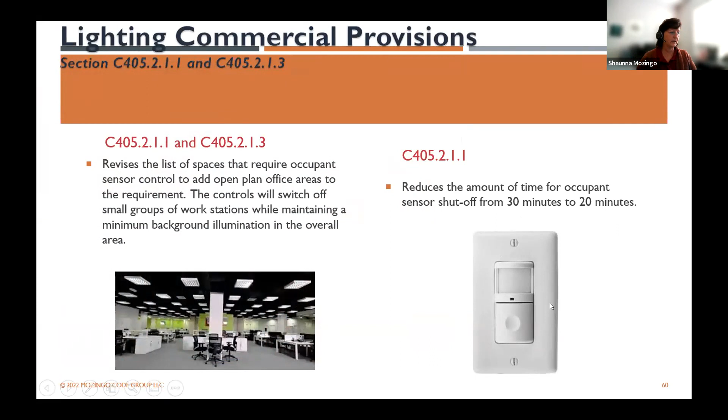Again, office spaces got a little bit of a revamp in 2021. So looking for that, and then making sure that they're set to go off after 20 minutes. And to make sure that they get commissioned. If nothing else, please make sure that your lighting controls get commissioned, get functionally tested.

If you have a requirement for an occupancy sensor and a daylight responsive control and something else, are they working together? Are they doing okay? Somebody needs to be looking at these things, because everybody I talk to says lighting controls aren't working. Every lighting commissioning agent out there says they're doing it wrong. It's not working. So something you have to decide in your jurisdiction is who looks at lighting controls. I'm an electrical inspector, I inspect to the NEC because that's what I'm licensed to. Well, I'm a building inspector, that's electrical - 9 times out of 10, nobody's looking at it. So at a minimum, look for functional testing so that we can make sure they're tested to work properly.

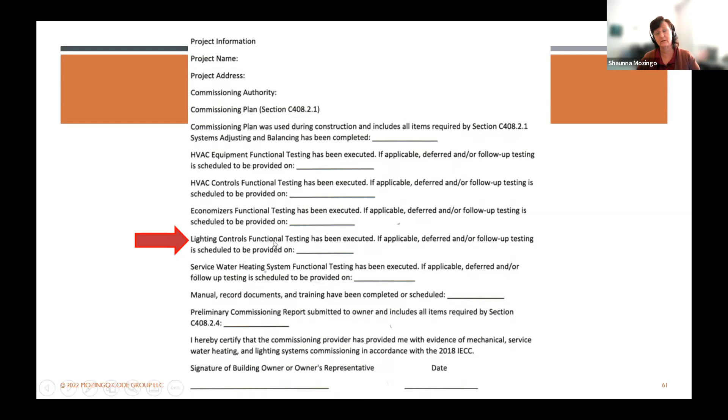There's a lot of new requirements in there, especially for atriums and primary side lit zones and daylighting controls and all of that. We're not going to go into all of that, but who's looking at that? The plan reviewer will be looking to make sure that all the zones are covered, but are you looking for that sensor? Are you looking for that daylight control? If not, who is?

There's very few times when a daylight sensor is required, but if they put in more windows than they were allowed, they have to do this. Or skylight - there's skylight requirements, or if they have real poor lighting, they have to do this. So they only have to do this under a certain requirement.

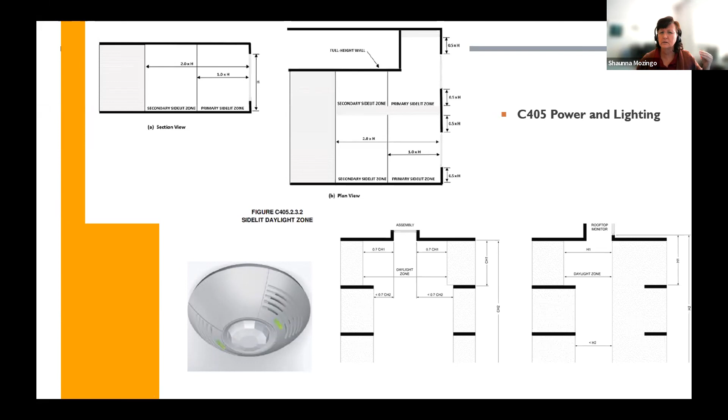So be sure you're looking for it. New to 2021, this is going to be fun to inspect: they have to have controlled outlets. 50% of the outlets have to be controlled outlets, whether that's every other one or 50% of each particular outlet, controlled to shut down when the business is closed. So that's something you have to be looking for.

Also new to 2021 is a mandatory requirement for energy monitoring systems. If it's a new building with a gross conditioned floor over 25,000 square feet, they have to, with some exceptions for R2 and some other things, have an energy monitoring system that monitors the energy use of that building. So is that set up? What does that look like? How are you going to inspect for that? What kind of reports are you going to get? Those are things that have to be decided now, so be on the lookout for that.

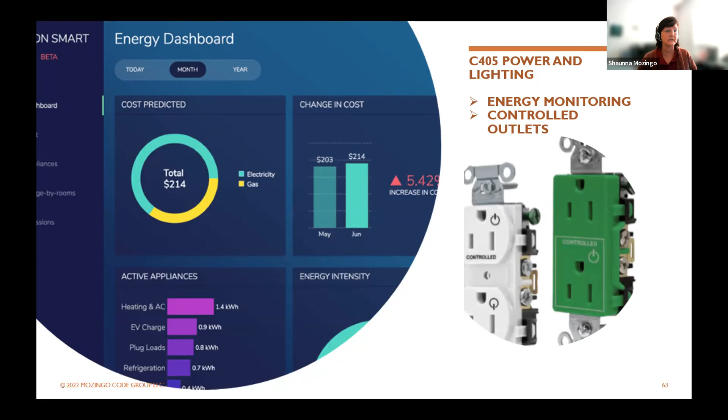All right, there's a couple resources. That is the highest overview I could give you to fit residential and commercial into one thing. As Erica talked about, that toolkit with our code helpline - that code helpline is for all codes, not just energy code. So be sure to use that hotline. You'll get an answer within a day or two from somebody on your code question.

Buildingscience.com is a great website to go to that really talks about air tightness and the importance of tight buildings, and about all the different layers of assemblies, so you can go in there and see how a wall should really look, or how a roof assembly should really look, so that you're inspecting it correctly.

Construction Instruction has a free app that gives you videos and all kinds of things about anything - air infiltration, leakage, ducts, anything building science related, dealing with construction. Amazing, and they're based out of Denver now. Construction Instruction, free, it's amazing.

Energycodes.gov - that's where you could download REScheck or COMcheck, but they also have some great resources on there about how to verify energy in a building based on assemblies.

One thing I want to point out is make sure you're always going to ICC's Errata Central, because if you're looking at a code book, I guarantee you it's changed 10 times over already. That 2021 IECC has so many errata - they print it and then find an error, and then print it and then find an error. So be sure you're pulling up the errata and inspecting off the errata, not the original printing.